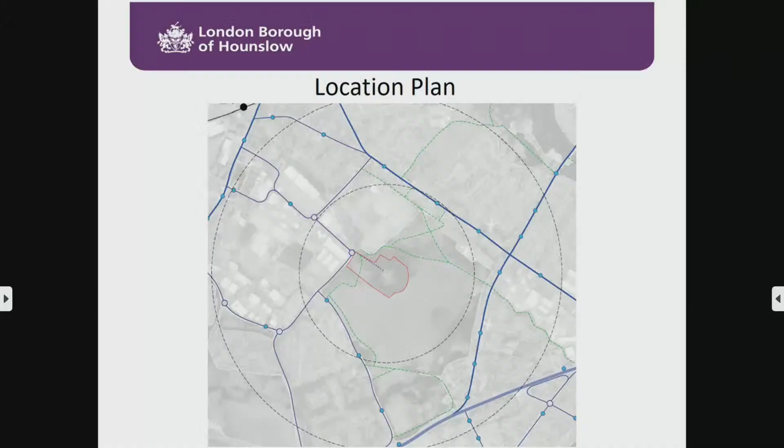Hopefully most of you know where Hanworth Park House is. It's obviously in Hanworth Park, which is within Hanworth Park Conservation Area. It is also green belt, which is going to be an important part of your consideration tonight. The application is to restore Hanworth Park House, which, as you will see from the photos, and I think you will be aware, is in a particularly poor state of repair. It's on the Historic England at-risk register, and I think that the case is being made that this is one of the last chances for the preservation and restoration of the house itself.

That has to be restored with community uses put in there. So there's an education centre, museum, an event space, artist studios, together with a live-in caretaker. And then as part of this proposal, there are 300 new homes proposed. So that is 120 social rent, as I say, that's the council side of things, and 180 private units, which go to fund the restoration of the house. I'll flick through the slides.

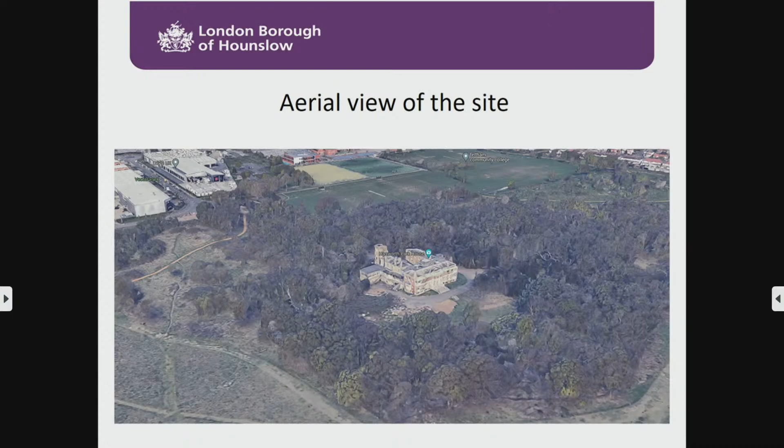The slide in front of you now is basically the outline of the application site in Hanworth Park House. That's broadly aligned east to west, slightly off kilter, but that gives you an idea of what the actual site itself is. And then this is an aerial view of the site. You will note a lot of trees there, which will come up later in this presentation as well. And then we've got a few pictures of what the house looks like in its current condition, or its recent condition anyway. So you'll just see it's in a poor state of repair. It's obviously deteriorated over time.

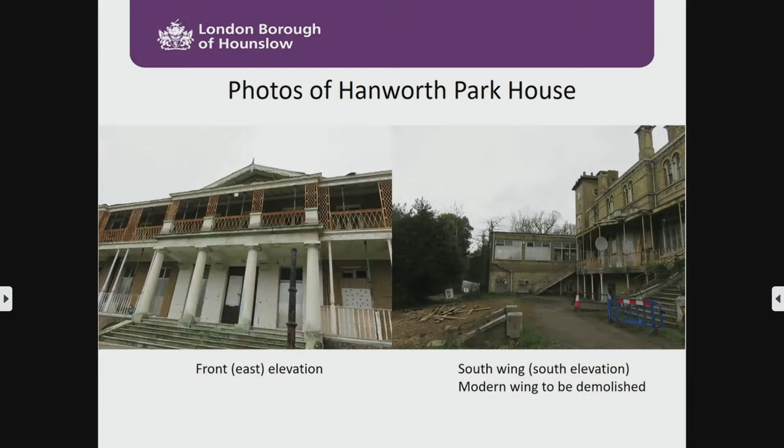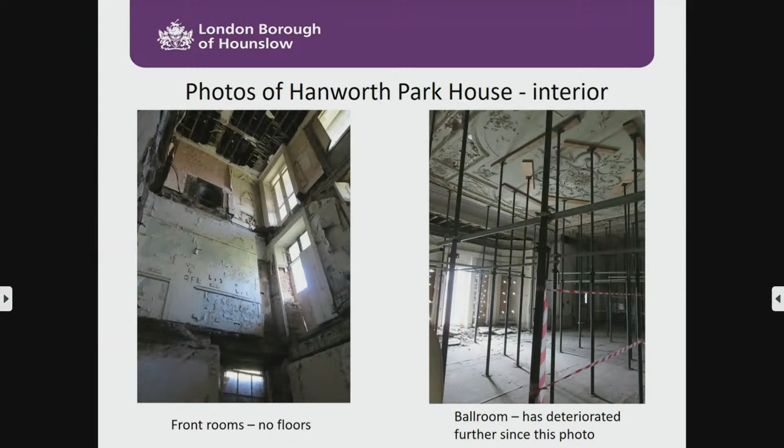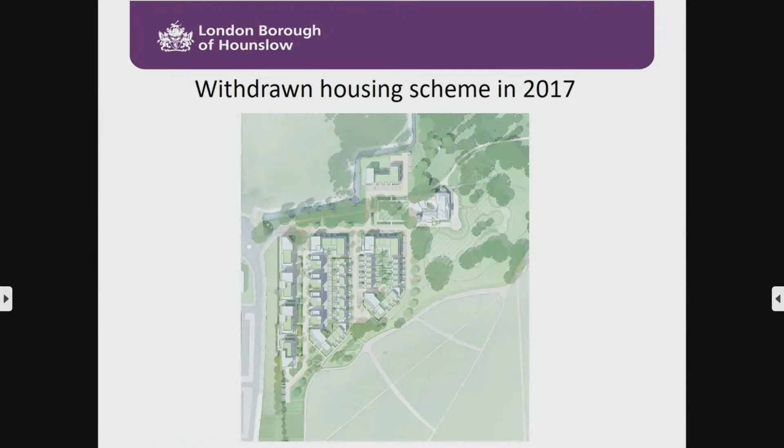There are extant permissions on the site. So in 1997, there was a nursing home approved on the site. Subsequent to that, there was a hotel permission and another hotel permission in 2003 and 2018, respectively, but none were brought forward. And then a withdrawn housing scheme in 2017, but I'll skip on to what it looks like at the moment. So what you're looking at is an illustrative master plan.

It's one of the most detailed plans you'll get as part of this. So you'll see Hanworth Park House obviously in the middle, which has been renovated. To the east of that is an open lawn area. The private units are to the east and immediately to the southeast of Hanworth Park House, and then to the southwest are the affordable homes.

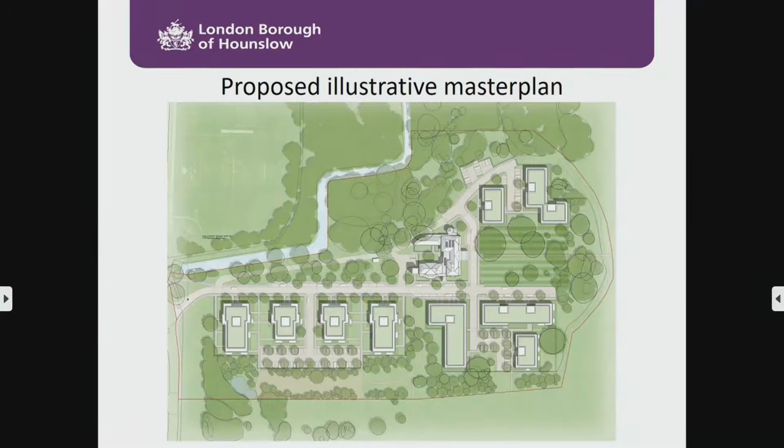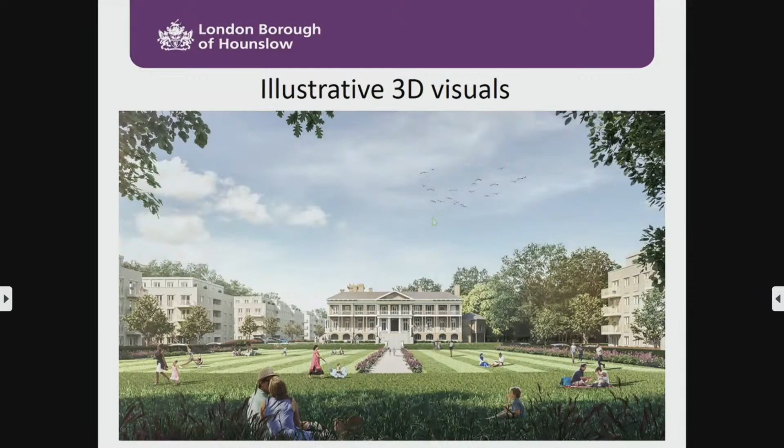So I will talk a little bit more about the parameter plans because we have some visuals here which broadly show you what it's going to look like. So that's looking back towards Hanworth Park House across that open lawn area, from the east back west, and then just some broad parameters of what it would look like in 3D modules.

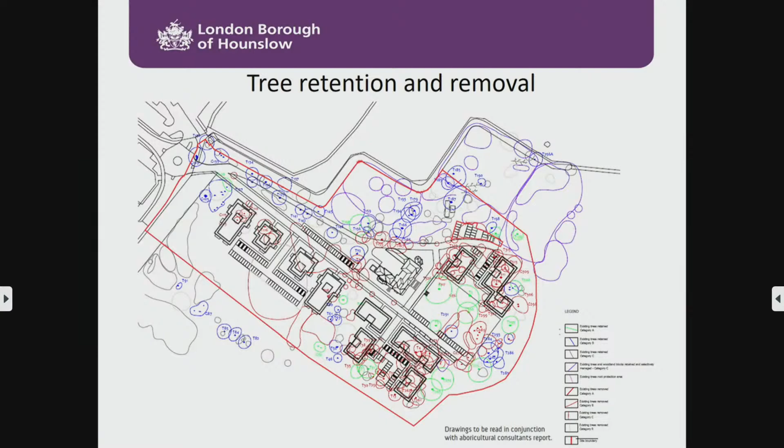I'll speak to the objections, because there were 123 letters of objection received, including some that you've received from residents recently. Basically, what you'd expect: people concerned about the encroachment of housing into the green belt, loss of public lands, the setting of the listed building, suggesting the buildings are too tall or of poor design, and then a lot of talk of planning balance, which is going to be very important tonight.

And at this point, I'll just speak to the issues from an officer's perspective. So obviously, there's the heritage issues. We're looking at whether or not we're causing harm to the 2 heritage assets here, which are Hanworth Park House and the conservation area in general. And the view that you're being presented with is that in terms of heritage, Hanworth Park House is obviously being restored. So there's a lot of heritage benefits attached to this scheme.

On the impact on the wider conservation area, we're suggesting there's not significant harm to the conservation area, on the basis that Hanworth Park House is being restored and it's shielded from the public realm, and there's not a huge degree of harm to the conservation area and its setting. The other big issue is obviously green belt.

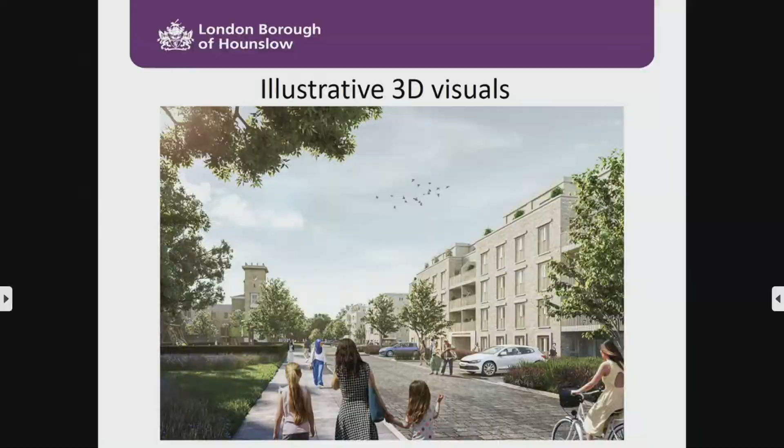So generally, policies don't allow development in green belt, and that's embedded within the National Planning Policy Framework and all other policy documents below it. So where you are proposing something that is deemed otherwise inappropriate within green belt, very special circumstances have to be demonstrated to allow the scheme. So members are being asked tonight to agree whether or not very special circumstances exist for this encroachment into green belt land, which would otherwise be not acceptable.

And you're probably aware of what the positives of the scheme are. You get a restored house, which is the most important part of the scheme, the restored listed building, which otherwise is likely to fall into disrepair. You get the community use within the house. The scheme also comes forward with more accessibility into the wooded area, the nature trails, walkways. You get the affordable homes, the additional homes, and you lose trees, but you will get a net gain of trees on the site. I think just over 300 lost and 600 planted in their place.

So essentially we're asking members to balance the positives against the negatives. And hopefully the negatives are relatively straightforward, as suggested in the objection letters. That's primarily the encroachment into green belt, loss of green belt lands, but some may deem the design to be unacceptable in the conservation area. The loss of openness is perhaps an issue. The loss of established trees is perhaps an issue. That's essentially what members are going to have to take a view on tonight. So if it's okay, I'll pause the presentation at that point and leave it open to questions.

Thank you, Matthew. Okay, questions for Matthew, please. Councillor Lal. Chair, a simple one, straightforward. Regarding the state of the house, quite clearly the council doesn't have the resources to put it right, and this sort of looks like an enabling development. In that sense, what other options have been looked at prior to this?

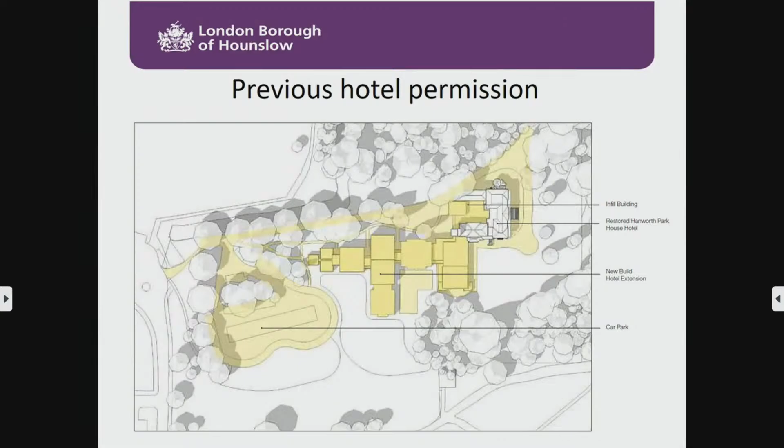Okay, Councillor, Chair, if I may. Any national funding schemes, heritage schemes, etc., applying for funding? There are no funds available from Historic England. They've been heavily involved in the process really from day one. And whilst sites such as Gunnersbury have received some funds, this site wouldn't sit under the criteria for allocation of any funds from Historic England. And because of the commercial element, they wouldn't get Heritage Lottery funding either. So they would be the two main sources of funding, and it's not eligible for either of those.

Okay, Councillor Rees-Williams. Well, it was a follow-up directly on that, which is in what areas does this fall short of the criteria for Historic England funding? I'm just curious as to why not. It's not so much that it falls short, it's that they do not have money. They are in the same position as any local authority or any other sort of public body in the last few years. Their funding is stretched to the limit. They probably wouldn't even be able to give us the money they've given us for Gunnersbury and Boston Manor now. So they would dearly love to give us some funds, but unfortunately they just do not have them at the moment.

Okay, Councillor Broad. Yeah, I'm surprised when you say that. We're giving away hundreds of thousands from our environment fund. Why aren't they suitable? Why isn't the lottery money suitable? The Heritage Lottery Fund will not allocate funds if it's not wholly publicly funded and accessible. So the fact that it's a private development, and the community facilities, whilst it's a great part of it, it wouldn't fit their criteria. Plus the fact that there is an incredible amount of competition, so it's far from certain they would get anywhere near the 13-14 million that would be needed to do this. But this council's done exceptionally well. All the major houses it owns, it's got fantastic grants. Let's move on.

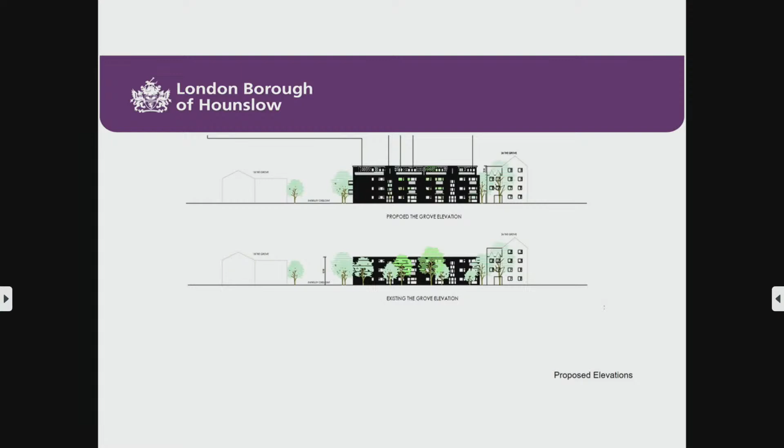Am I right looking at that previous image that with the added level on top, it's still below the height of the building immediately to the, what is that, the east? The north. And then that one on the left is the nearest other property. Yeah, so the total height of the building would be 11 point, just double check I have got it in my report.

11.1 meters, so yeah, it wouldn't be taller than Wyndham Lodge to the north of the site. I think we had, sorry, another question. I think we had comments about the new appearance of the stairwells and the cladding of that. So, we've recently had a similar application in my ward, and the building was being reclad as a result of the extra levels going on. Is that what's happening here?

No, so there's no changes to the external appearance of the existing building. I think the drawing is just simplifying the materials. As I said before, the 3D visual is just a tool to assist us in addition to the 2D plans, which show the development in full. But so are there or are there not any changes to the stair cores? There's no changes to the stair cores.

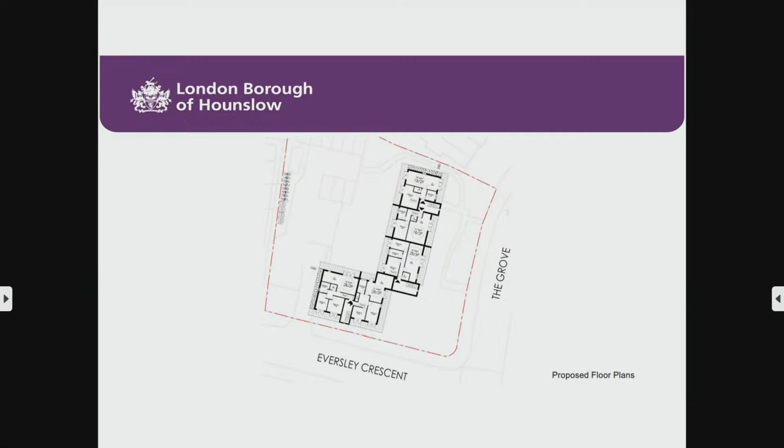Just the stair core, unlike the rest of the additional storey, would not be set back, as shown on the plans. So no, the only change to the stair core is they're just bringing it up an extra floor. At the ground, first and second floor level, there's no changes to the building at all. And we're getting a little bit confused because the 3D visual does actually show changes to what's there existing. That's not being proposed in front of you tonight. Sorry. Thank you. I think that's why we were all confused.

Councillor Todos, I think that needed to clarify. Okay, Councillor Williams, thank you. Councillor Bhatti, your question? Yes, thank you, Chair. Can we go back to picture one that you showed, please? One before that. No, not this one. The one I see on page 239, the house. That wasn't in the presentation here, sorry. Okay. But we've got the report in front of us, so by all means ask questions on that basis.

The question is that the height of this roof is higher than this, although it's 11.1, as you say. Yeah? That's correct, yes. And the staircase, is that already there, or that's just the proposed thing? So everything that you see above the second floor level is new. It's new, right. So looking at this roof style or design would be much better than just a flat sort of type of thing.

My thought on that. So there are other examples of this flat roof style of development within the surrounding area, not next door, but to the south, there was another example, Grovewood Court, which is a 4-storey flat roof building in a very similar style to the application site, which is where the precedent for this proposal is, seeking to replicate that design rather than necessarily the pitched roof design, which is a bit more common in the more modern buildings, rather than this interwar style of architecture, which is the building this is seeking to follow. Thank you. Councillor Luki.

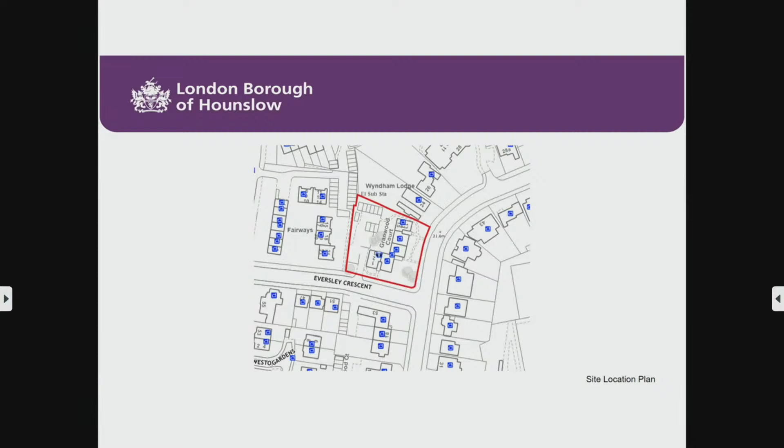I'm a bit concerned about the depiction here with this sticky-out stairwell. So you can assure us that there's no intention to stick that out? Yeah, so the 3D visuals don't form part of the approved plans condition. The approved plans will only be in relation to the drawings that were in the application file, so the proposed elevations which have been supplied. None of the 3D visuals will be included in that approved plans list. Sorry, Chair, and one more. How does it configure on the inside? We've had a problem with a building on the Osterley Road.

Somebody's taken it upon themselves to try and put a new story on there. Yeah, what checks have been made on the stairwells and the access to any potential flats should this be approved? So most of those matters you've raised are not planning considerations, and in the planning statement it did include that the building was structurally safe for an additional story.

However, obviously those particular regulations would be taken into consideration as part of the building regulations procedure following the grant of planning permission, rather than at this stage of the application. However, we are confident in terms of fire safety that the building would pass all the tests, and each of the flats will be accessed through 3 separate residential cores as is existing.

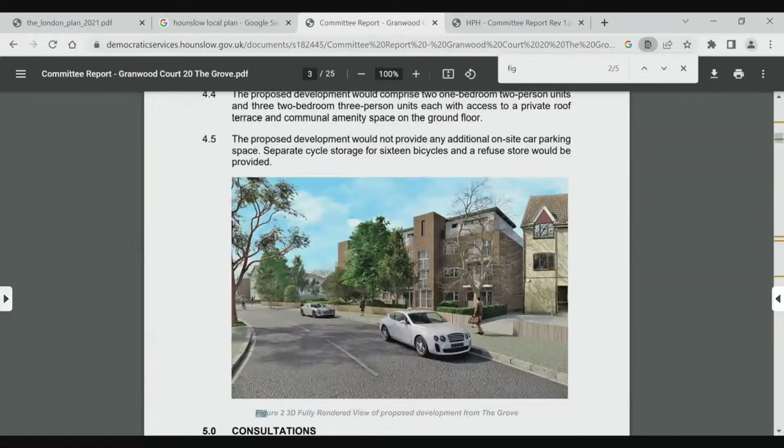Just whilst we're on that one, if you can scroll up and look at figure 5, which is on page 250 of the report, please. And you've got the layout there, and you've got protruding entrances there on that drawing. And that's not 3D. That is a drawing from the application. I know we're not really asking a question to Councillor Chowdhury, but if officers can confirm that is what's been applied for, and that does correspond to the 3D graphic.

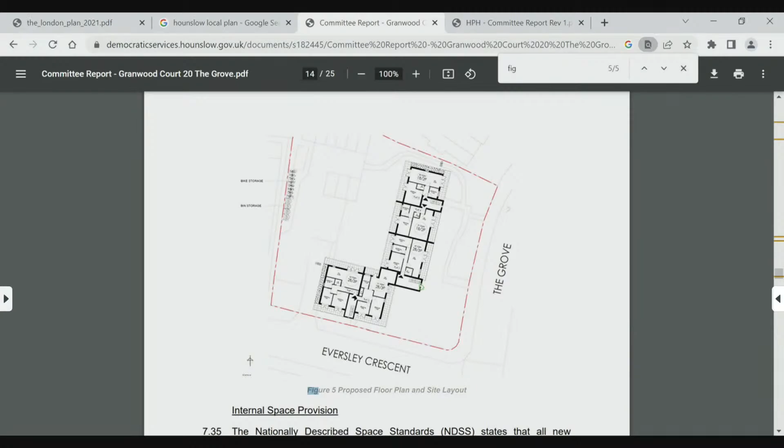So that's what's being applied for. So the existing stair cores are like that. So the proposed building is set in about 1.5 metres from the edges of the original building line, with the exception of the stair cores, which will be the same as existing.

So the stair cores will be clad in the same materials to match existing, therefore drawing the visual cue from the host property. So that's how the proposed development is in keeping with existing. So it draws visual cues from the existing property through the use of the stair core, whilst remaining visually different to show it is an extension to the existing building.

Sorry, Chair, but what's drawn there looks like the same as what's on the 3D graphic. The 3D graphic, if you just go back to the drawing, just to make it a bit clearer, shows a slight extension to the existing stair cores, so the stair cores on the 3D graphic protrude out slightly further than they do as existing. Okay. Sorry, Chair, that doesn't help.

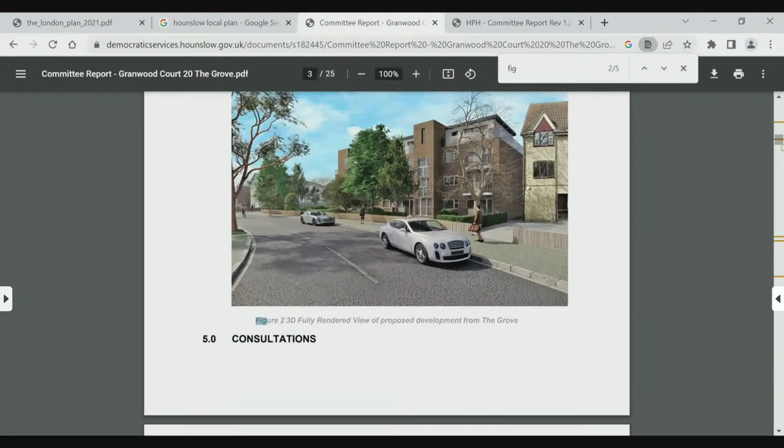All right. Okay, so any more questions? Thank you, Councillor Chaudhary. And can I now invite objector, Jamie Sullivan, please? Mr. Sullivan, you'll have 5 minutes, and we'll remind you when 30 seconds are left. Thank you, Chair. Yes, I'm Jamie Sullivan, planning consultant from Iceni Projects. I've been instructed to appear today on behalf of the residents of Granwood Court.

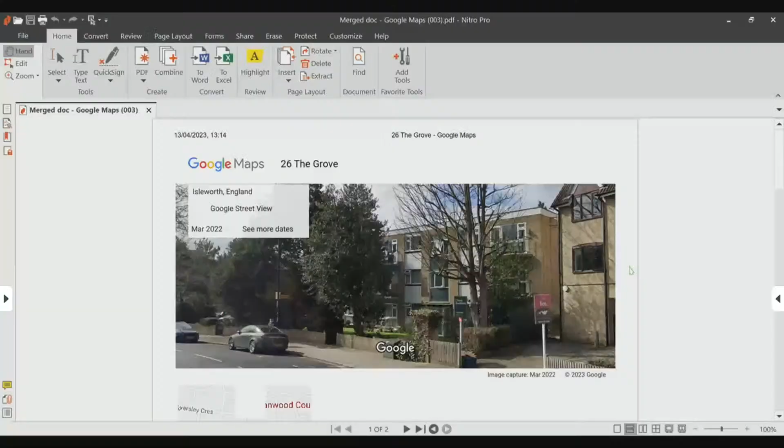So you've covered off quite a bit of my first point around the inaccuracies of the stair core. There's more to it than that in terms of the issues here that are being slightly distorted. So if you look at the visualization below 4.5, which would match up to what's on the screen at the moment, it's not just that stair cores are being proposed that won't exist. There are also changes to the materials alongside it. So you see the white paneling next to the stair cores. Those are also shown in the visualizations as being bricked up, but that's not actually the case.

The other issue here is if you look at what is existing on the site, there's actually a much more complicated palette of materials behind that stair core. If you look at that visualization, you believe you're getting a nice, clean brick facade, new brick entrance, clear glazing. That's not correct. You won't get that stair core. What you'll have is what is behind it.

Now, officers are suggesting quite rightly that 3D visualizations are there to assist you, and they should be there to assist you in these instances because you're trying to decide whether or not this is appropriate in a conservation area. The problem is these visualizations do not assist you. They only mislead you. Those proposed plans and the visualizations show two very different design approaches and strategies. I wrote my representations and I had to write different comments for each different approach.

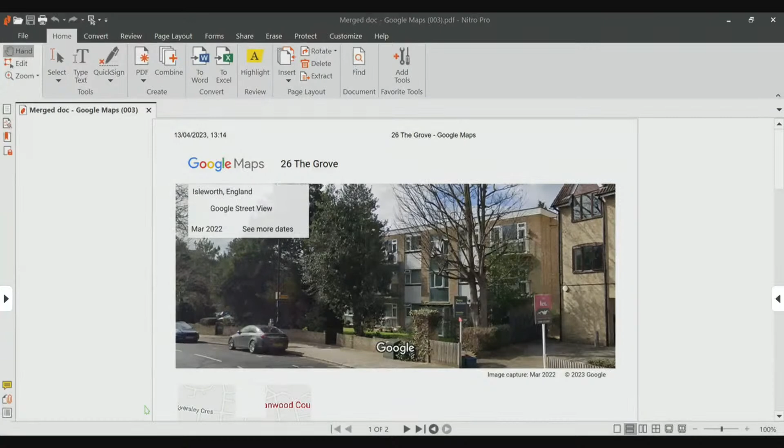So as I've highlighted before, the main issue here is that this design proposal has a very cluttered palette of materials. I won't list them all, but it's quite loud in terms of what is there already. And it's got a lot of different varieties of window arrangements as well. The new storey adds even more mixes in terms of materials to this already quite eclectic mix. Most importantly, I would add, what will actually happen in the stair core is you'll get a new brick crown on top of the stair core, which is at odds with the rest of the building.

Now, the issue with this and why it's important to highlight this is that you're being shown a more simplified pattern of materials than is being proposed. And the problem is what's existing, which you have to piece together from looking at these existing views and elevations, is that you're going to create a very discordant feature within the street scene with all of these different materials and design approaches being mixed in. And in my view, this is a building that should be merging into the background, not being brought out into the forefront.

My other concern was around this being a flat roof building in the conservation area. I touched on this before. If you look at the existing building, currently you have the roof line below the eaves line of the adjoining building. If you increase it upwards, you break that building and you make it more dominant within the street scene. And as I said, this is something we should be seeing merging back into the street scene rather than being more visible.

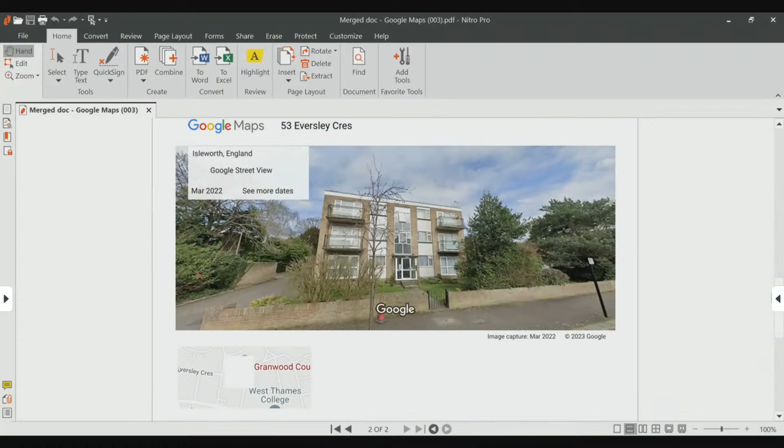So overall, I'd say the main issue here is that there are significant issues with both design quality and submission. And this is a scheme in a conservation area and a borough that demands high quality design, which is not being delivered by this scheme. Thank you. Thank you, Mr. Sullivan. Questions for Mr. Sullivan? Nope. Go on.

I mentioned this earlier, Mr. Sullivan. The contrast of the proposed white extension on the roof with the brick below. Yeah, where else do we get that in the area? I mean, I know where else we get it, but perhaps you can tell me, and I can correct you if you're wrong.

I believe there's another Art Deco building within the conservation area where it's been successfully delivered, but that is where you just have this very simplified palette of materials where it's mostly brick built, and then you get a white extension above it, which is not being proposed here. You may well correct me if there's another option. No, that's the one. That's Thornbury Court, and even that's not really been built to spec. I've got to raise that with planning enforcement.

Thank you. Councillor Stoughton. Yeah, thanks very much for your very comprehensive analysis. Just one question. You suggest to us that the visualization we're being shown is not what we'll get. What do you base that on? What leads you to believe that visualization is incorrect? Well, just comparing the plans and what's there as existing.

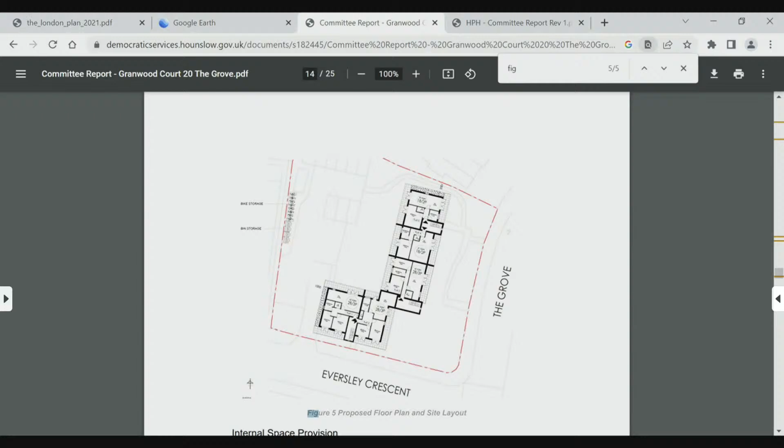So I think I can help you here. Can you confirm where the outer edge of the building is? Is it the thick black lines or the less visible grey bits on the side? So this is the outline. It's still the envelope of the building at the lower floors, so that's not changing. The thick black line is the top floor, the new floor. So the top floor sits back.

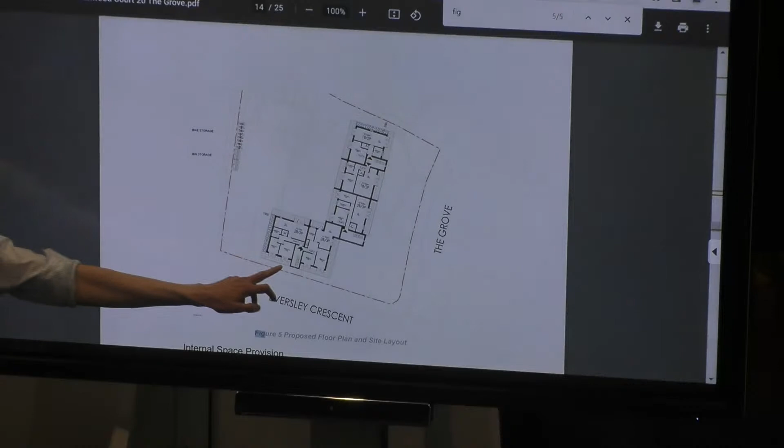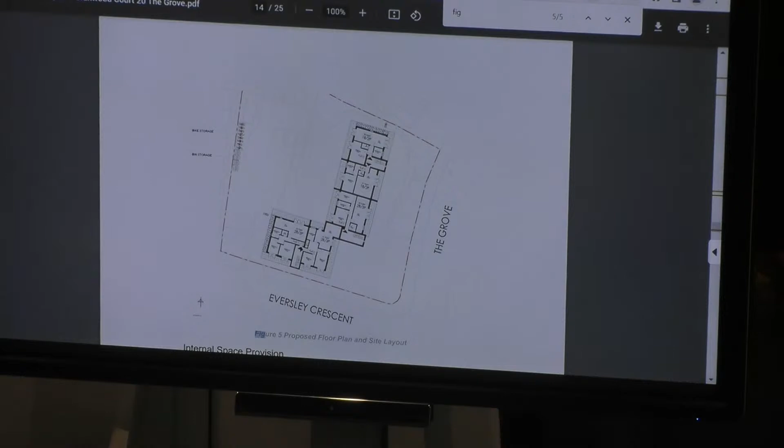And yeah, I think we understand that, Matthew. It's just that when you look at the stairwells, 3 of them, the objector was suggesting that they would actually protrude further than the current building. But if what looks like paving stone is the current building, they're not. They're flush up against it. And it's only once you get above the height of the current building that there's any prominence to them. Is that correct? Yeah, that's correct. The tiles are the roof space for the proposed units.

So thank you very much. There's not going to be protruding balconies on the top story. There'll be roof terraces. Thank you.

So we're looking at an extra floor there on top, and that's a black roof, and the materials there are very different to what's being proposed. If you look at the Spring Grove Conservation Area chapter on conservation areas, you'll find that these buildings are referred to in that document, and they're part of the character. Adding an extra unit on there.